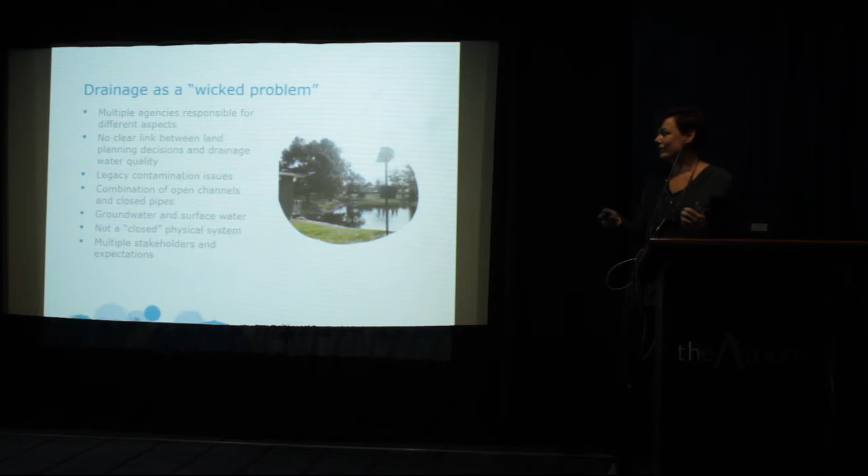We don't necessarily have a clear link between land planning and drainage and therefore water quality outcomes. We've got lots of legacy old contamination issues throughout the drains and nobody really responsible for water quality. We've got in the Water Corporation and in council drains a combination of open channels and closed pipes, which makes the systems quite difficult to model and therefore understand and fix problems.

In Perth, particularly in the Swan Coastal Plain, we have in some areas very shallow groundwater, which means that a lot of our drains, if the base of them is low enough, are actually draining groundwater and moving it around. In some cases that's not necessarily a problem, but it does add to the complexity of the system. So in a water or a pure hydraulic sense, it's not a closed hydraulic system.

So when our colleagues at the Water Corporation model the water supply system, for example, they know how much is coming in and they know what the losses and leakages are and they know how much we sell our customers and Bob's your uncle. You can really easily plan for that. Drainage not so. So as an open physical system, it makes it quite complex to manage.

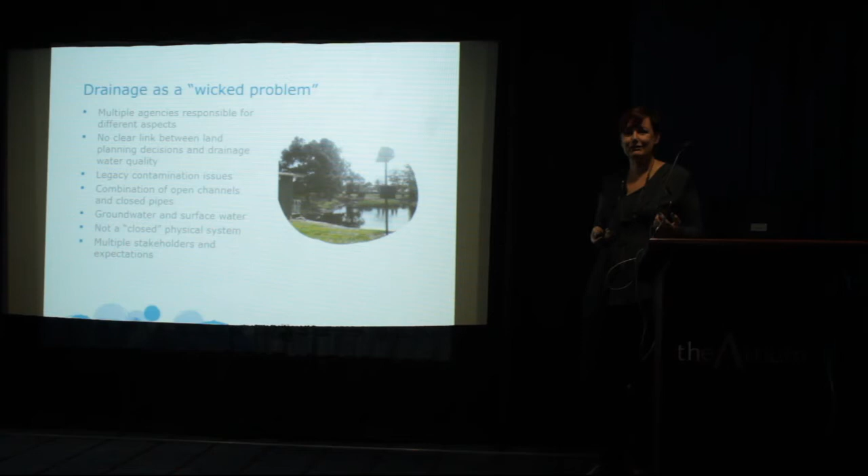And as I said, we've got multiple stakeholders, multiple different expectations. Obviously, drainage is there for a purpose. It's there to allow development and not have flooding. But we also want to have nice natural water features in the landscape, like rivers and streams and wetlands. So how do we balance those two complicated expectations?

So for wicked problems, traditional approaches don't work. Traditional approaches where everybody just agrees what the problem is and you just take an engineering approach and you just fix it don't necessarily work. And you need to shift your thinking from a pure solution mode to the ongoing long-term, maybe small iterative interventions while tracking your long-term strategy and your long-term outcomes.

So, I took this job just over 2 years ago and I had quite a few raised eyebrows like, drainage? Water Corp does drainage? Why do we even need drainage? It hasn't rained in Perth since 1996. Why would you worry about it? Now these are relatively recent photos. All of these are in the last 5 or 6 years. These are metropolitan Perth streets.

The big one on the right-hand side is in Fremantle. So if we get a combination of a high tide and a big rainfall event, we actually turn Freo into Venice, which would be nice if we had gondolas. But it's really, really inconvenient for the businesses, and costs a lot of money to mop up and clean up.

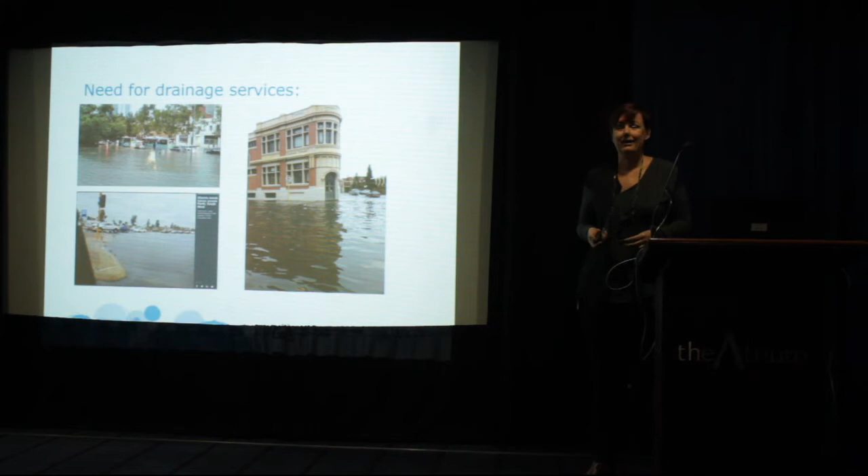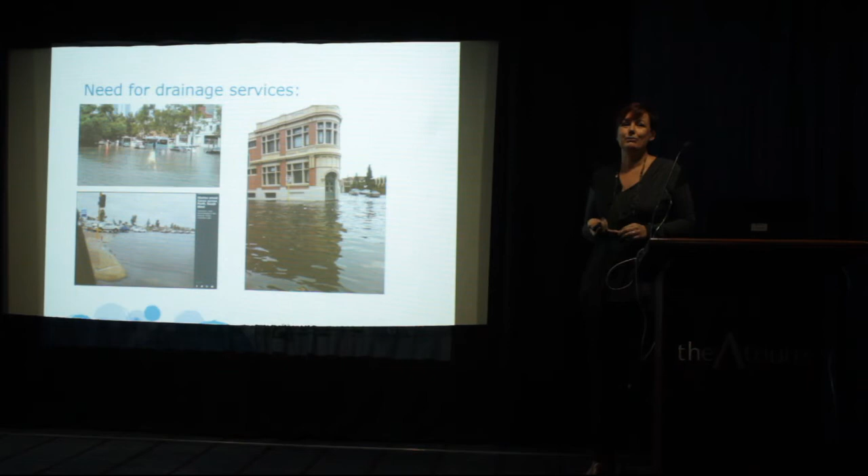And the other two photos, the top one's in the CBD and the bottom one is in the southwest region, I believe. So we do occasionally have events where drainage is absolutely needed. And we know also that climate change is going to be causing more extreme, more frequent events of this nature. So our current infrastructure might not cope.

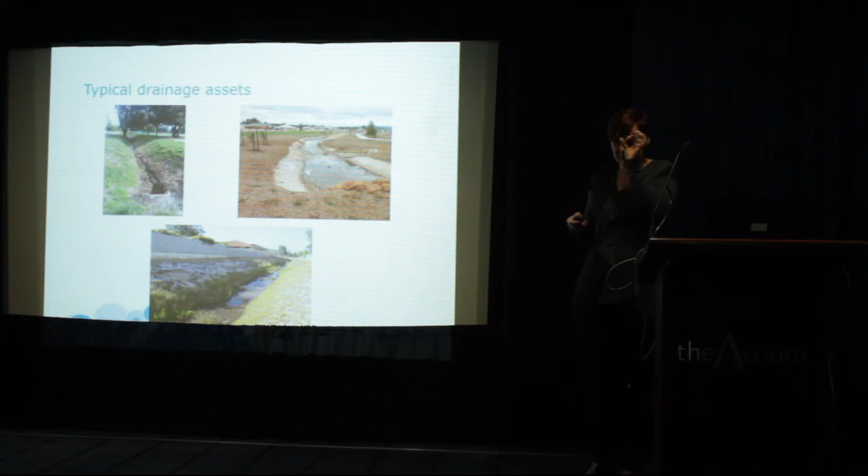The other thing I did when I first took the job, and so I'm the asset manager at the Water Corporation for Drainage, I went out on site and had a look at a few of my assets, and I peered through a fence on that one, the one below. That's actually taken through the chain mesh fence, and I looked at this drain and I went, you know, as asset manager, I'm not particularly proud of that.

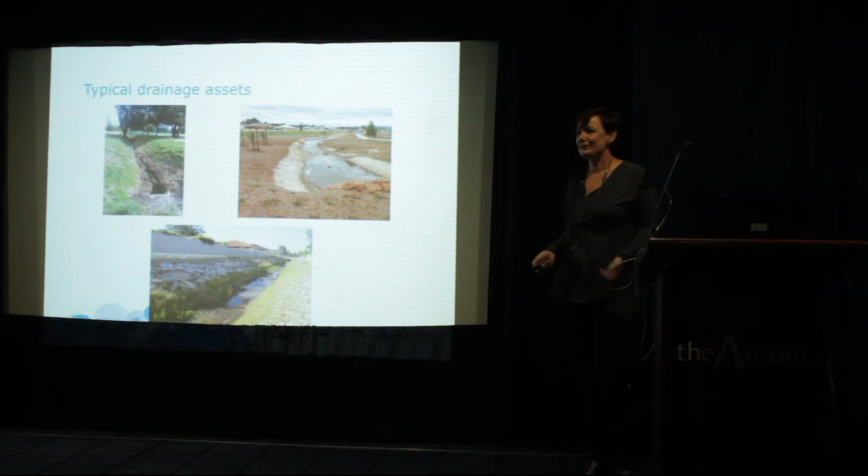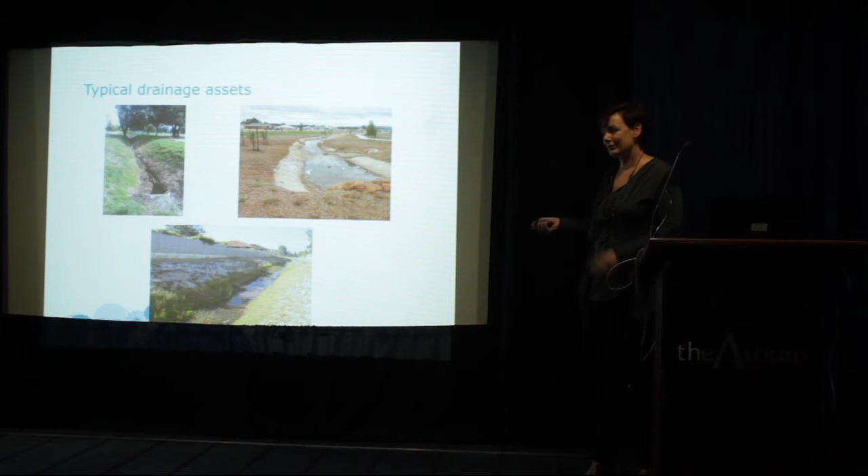That looks pretty terrible. So if I'm going to go home and tell my kids what I do, or my parents, you know, explain to mum and dad what you do, I manage drainage, and I show them that, it's like, that's not that flash hot. Surely we can do better, was what I thought. And I think we can. So these two are actually Water Corp drains. That one's a developer's drain, so I'm not claiming that as ours, but it's not atypical.

So in parallel with taking on this job a couple of years back, there was a review of what options government had for managing drainage. So this was a joint review between the Water Corporation and Department of Water and Environmental Regulation. And I won't take you through all the process stuff of how we got here, but the findings were really interesting. And the findings were based on lots of workshops and lots of consultation, and also I had to have a look at the literature around what management models you should use, because everybody said you need to reform drainage, you need to reform institutional arrangements. Something needs to be different about your institutions who manage drainage.

And what we found was, because it is a complex problem, there is no perfect institutional or governance model for drainage. You can slice it up and dice up different responsibilities, and if you don't fundamentally change the way you approach drainage problems, you'll still get the same outcomes.

One of the other big findings was there have been several MOUs, and probably some people in this room have been involved over the last 25 years or so in development of an MOU on drainage or water quality or management of water assets. And a lot of time and a lot of investment in intellectual work has gone into developing MOUs that have been, you know, 50 to 80 pages long, legalistic, lots of goodwill and good intention, and then they've sat on a shelf, and a couple of years later someone has said we need to do another MOU. So it was pretty clear that those sorts of approaches weren't getting the outcomes that we all, as institutions and stakeholders, were really keen on having.

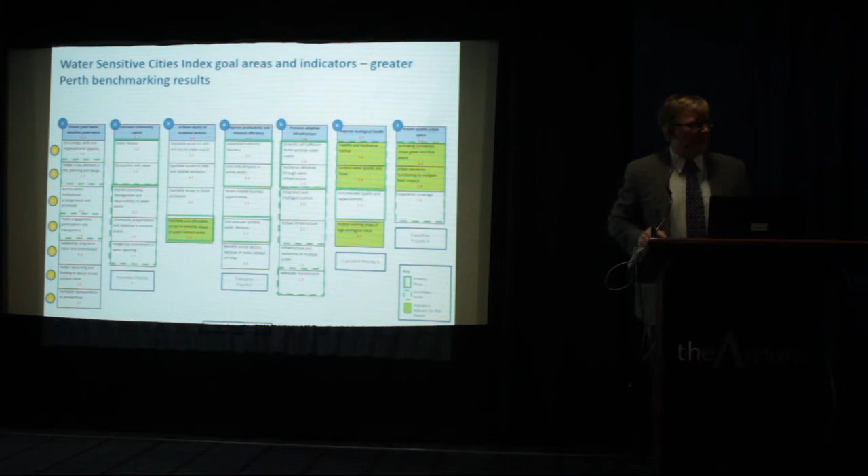Not that familiar with this slide, Suzanne, but it does point out, I guess, the importance of the index that's been done by the Cooperative Research Centre for Water Sensitive Cities. And it talks about some of the priority areas and how we benchmark against other cities in Australia and around the world. And it starts to point out that where we're heading with the new direction lines up with these sorts of pieces of work.

And I guess the other thing, we are undertaking a fair bit of work with things like Metronet at the moment. And you start to look at the infill and precinct development that occurs surrounding those stations and lines, and you start to understand with infill development, where is the land left? And a lot of the answer is the infill areas that are around Morley, Midland, Armadale, Canning.

Anyone understand where I'm going? These are all drainage districts. So this drainage infrastructure that was designed for conveyance into the future holds a very, very important role in terms of livability and spaces. More on that later.

So what does this mean? I think in the past it's fair to say there was probably frustration with all concerned about same organisations within one water portfolio coming up with different advice. That's actually understandable if one group is working towards conveyancing and one is really concerned about water quality.

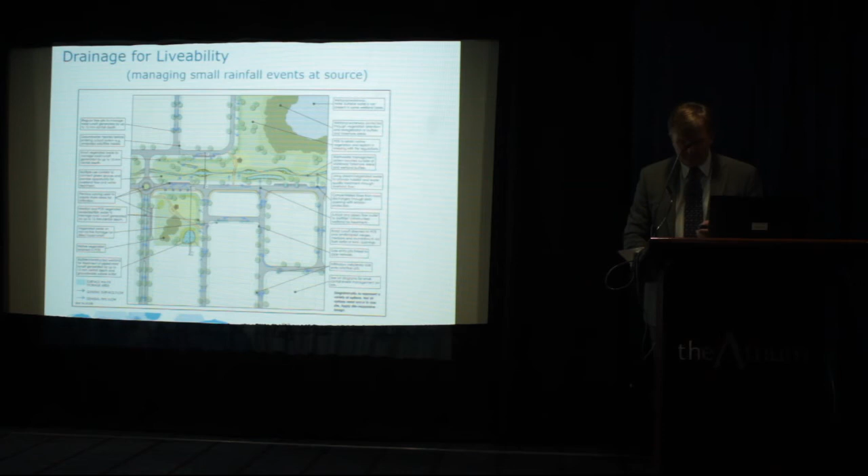The other one in there, okay, that's all right. There's another new one that we're working on, and I think I probably should change that title, multiple use outcomes. I think it makes more sense if we refer to that as stormwater integration into the public open space that I was just referring to.

So, if we design our stormwater systems, and if we just collect up all that water from the hard stand and send it down to the end of the line, and if that then ends up in a basin within public open space at the bottom, that's going to be large infrastructure. So people will start to get concerned with that. That's not what the Department and the Water Corporation are trying to say.

By using the methodologies and techniques we referred to in the previous slide, we showed how the water can be put into swales and rain gardens and other water-sensitive urban design techniques along the way. And even though we're doing that for water quality reasons, I do think there are bonuses in terms of how we fit these stormwater systems into public open space.

There will be gains. I know for a fact that local government is a bit worried about some of the sizes of infrastructure in POS. I think by issuing this technical guidance, we're actually trying to look at how we can go about that. And this will contain shared information that is signed off by both the Water Corporation and the Department of Water and Environmental Regulation to achieve that outcome.

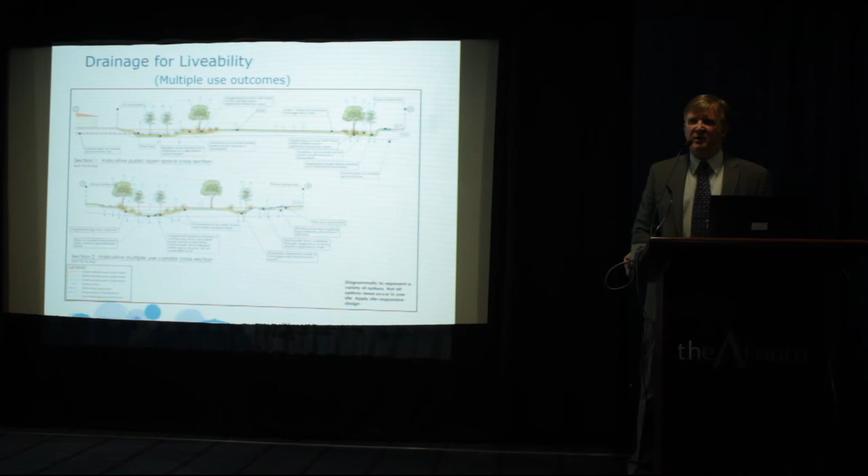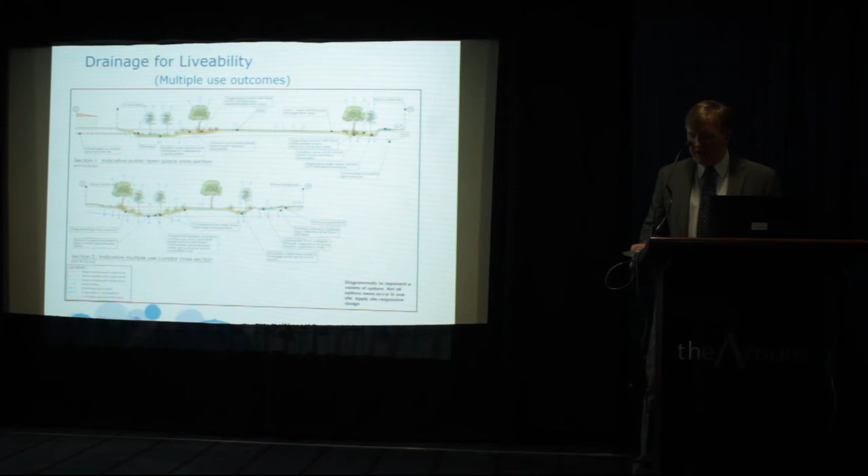And I don't think it's a matter of shoehorning water sensitive urban design. If we consider these things up front, we can probably achieve a lot more, and I think the community will thank us for it. So that'll be another information note that we release. So that's my little spiel. I'm going to hand you back to Suzanne. Grab my stuff, there it is.

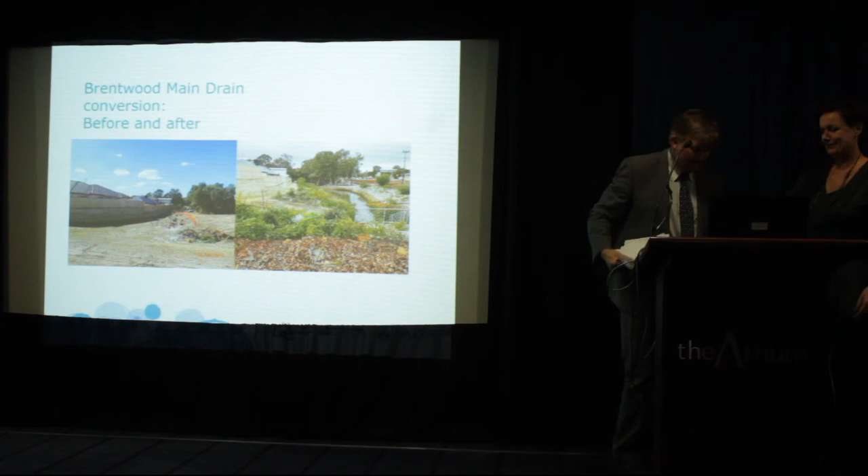So I guess the purpose of today was to talk through a couple of different aspects of the Drainage for Livability program, and if you take a couple of key messages away, one is it's a change in behaviour and a change in approach between the two agencies. It's not new science. The science has been around for years about the benefits of water sensitive urban design and proper integration of blue-green infrastructure into harder infrastructure like roads and streetscapes and that sort of thing. So it's not about the science of water sensitive urban design, it's about the approach that the two agencies are taking and documenting those approaches in joint guidance notes.

We know it's been really well received by developers and by councils. The reaction to the very first one on a joint approach to living streams was really well received, particularly because we got the graphic artist to put some vegetation in the base flow channel, and I think that was probably the single biggest breakthrough in the Water Corporation in 50 years of drainage management. Going, yeah, it doesn't actually cause World War III, and if we go out and have a look at any of our drains, they've already got weeds and crap growing in the base flow anyway, so keeping good stuff out makes no sense at all. Well vegetated drains are well managed, and if you plant deliberate sedges, you're obviously keeping the weeds and stuff out.

So a couple of key messages. The documentation of the joint approach is really important, and getting the message out to developers and to councils about the new approach on those documents is really critical. The other part of it is, of course, the conversion of actual physical infrastructure. And so I'm just going to take you through some photos of stuff that's happened in the last 12 months or so, and then some ideas for things that we're going to do, and then maybe some kooky off-the-planet ideas that would be lovely, but I don't know if we'll do it.

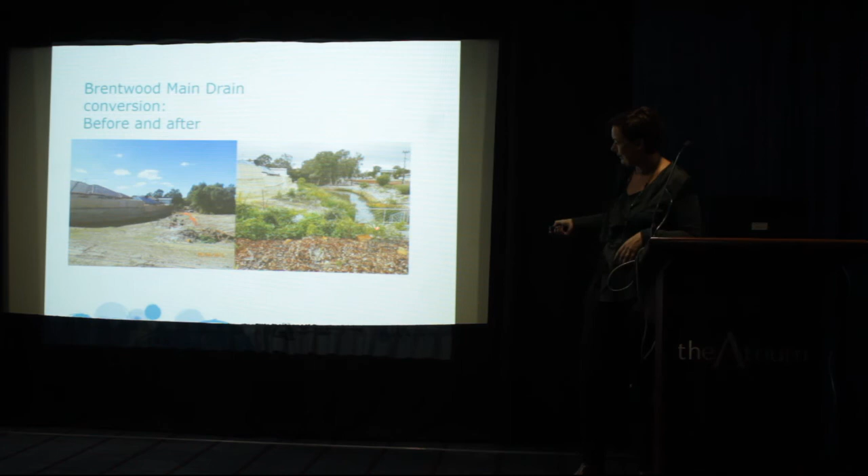So the pipe was, and I hate using this word because it's a noun that's been verbed, it's been daylighted. So the pipe was dug up and a head wall built, and so it comes out from under a road here, so it still had to have a pipe here, but then it pops out and then there's this beautiful stream that's been created. This was a partnership project with DBCA, City of Melville, Water Corporation, Circle, a real collaborative project that started before the Drainage for Livability program, but it's an amazing example of what you can do if you focus your efforts and energies as a bunch of organisations wanting to achieve the same thing.

The reason I put it up is that I know that some of the approvals through Water Corporation and just the coordination took a very long time, and we also have anecdotal stories from other local authorities that tried to do cool things like this in Water Corp drains.

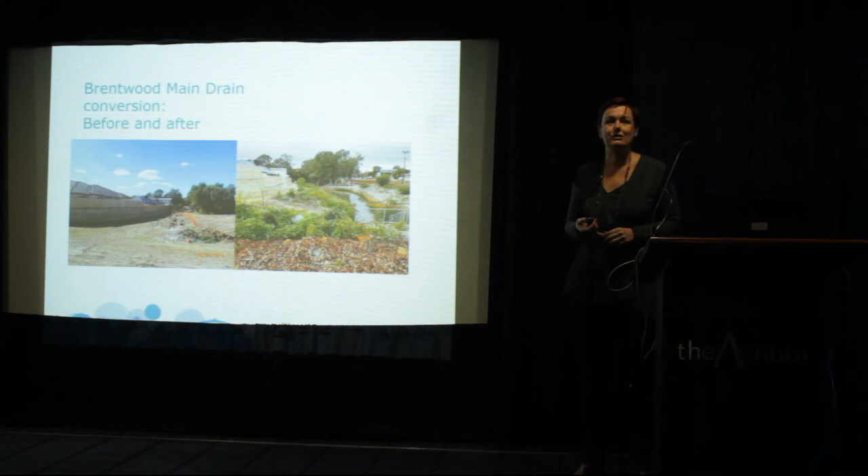One in particular took 7 years. Now, I worked on the Southern Seawater Desal project a couple of years back, the big one down near Binningup, and we took 2 years to get through all of the EPA, state EPA and federal environmental approvals. If we can do that in 2 years, build a 100 gig desal plant, surely we can get a drain converted in less than, let's say, a couple of months. Let's be ambitious.

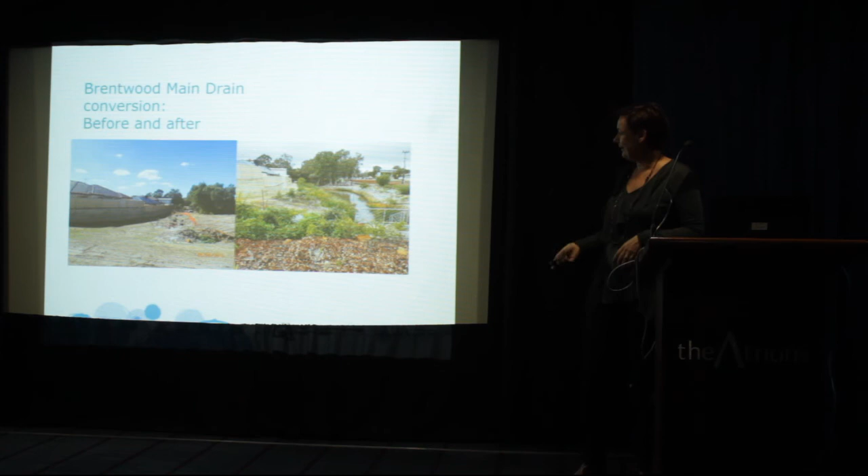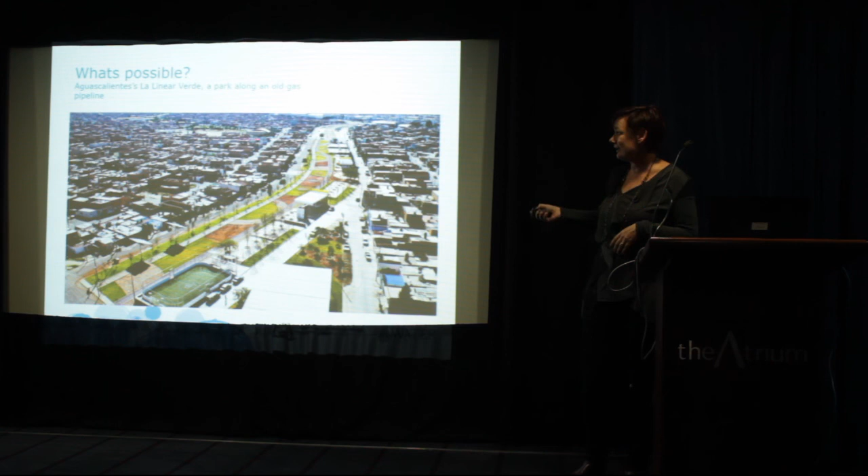And again, this is an old gas pipeline that's being converted into a mixture of land uses, but a green sort of ribbon through a really highly developed area that otherwise wouldn't have that sort of infrastructure.

So that's really why we're doing this, that we can see that there is so much potential in converting those really ugly trapezoidal waterways into something really beautiful. But through a mixture of on-ground projects and joint guidance and standing together as two agencies when we're advising councils or developers or consultants to developers, and taking that shared vision and turning it into something like this.

So that's it from us, I guess. We're very happy to take questions or discussion or disputes or... Well, there's got to be at least one question. Yeah. Right, that's it.

Well, so we did a conversion of Main Drain through Wandi, and that took 7 years as well, so you can add that to...